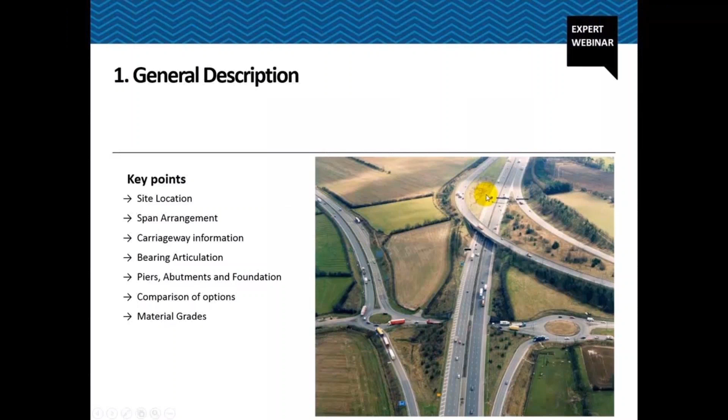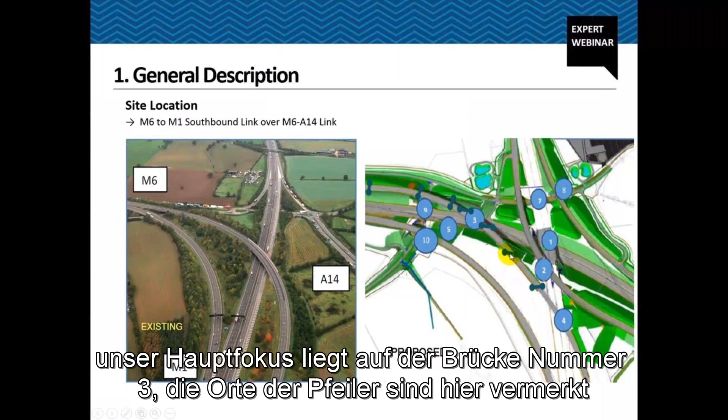So our main focus will be bridge number 3, which you can see here. The pier locations are marked. This is a 6-span bridge. You can see the skewed piers near where the 3 is written.

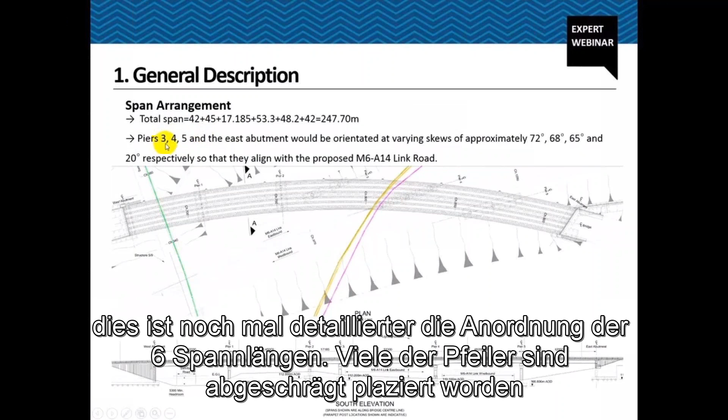So this is going to be the span arrangement in more detail. There are a total of 6 spans, and most of the piers are skewedly placed. You have piers 3, 4, 5 and the east abutment, which are having a very high skew in the range of 60 degrees, so that they can align with the proposed M6A14 link, which is going under the bridge.

And that's the elevation.

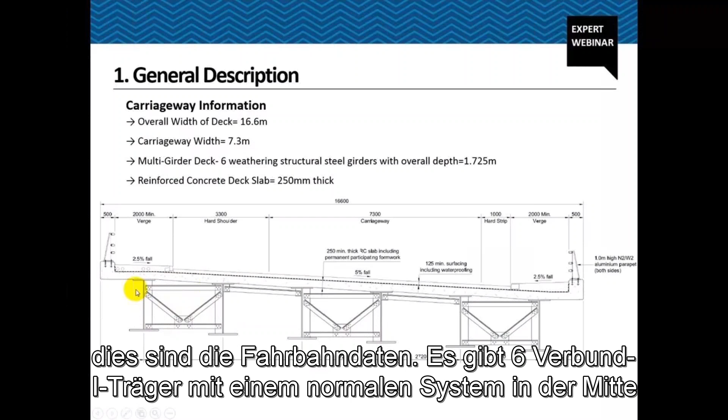This is the carriageway information. You have 6 composite steel I-girders with the bracing system in between. Overall width of the deck is 16.6 meters. The carriageway is 7.3 meters wide, which according to Eurocode will be designed with 2 notional lanes.

And then you have the reinforced concrete deck slab, which is 250 millimeters thick. The overall depth of the girders is 1.7 meters. And you have 2 verges on either side, 2 meters each.

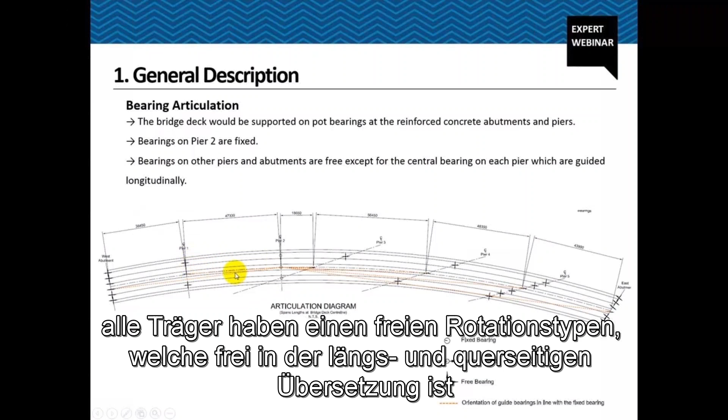The bearing articulation of the bridge is as shown here. Pot bearings have been used, and all the bearings are having a free type of rotation, which is free in translation in the lateral and the longitudinal direction, except for the central bearing for each pier.

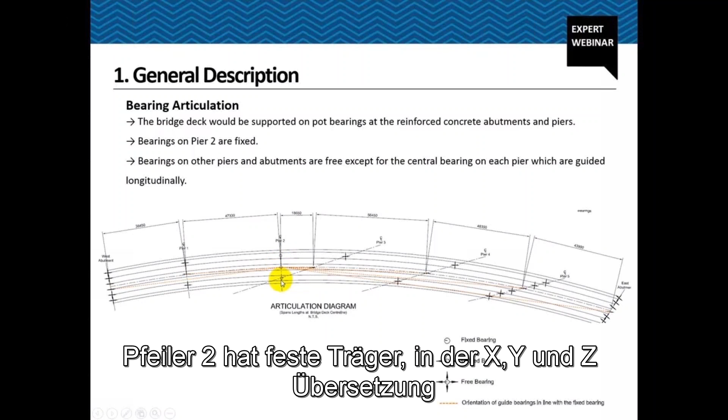As you can see here, the central bearing for each pier has been guided with respect to the central bearing on pier number 2. Pier number 2 has fixed bearings, fixed in X, Y, and Z translation. The columns are free to sway such that they can take the temperature movements.

Then the abutments and piers are reinforced concrete. Piers are basically circular in shape, with a torch shape, tapered - on the top they have a larger dimension and then tapered, finally having a dimension of 1.4 meter diameter.

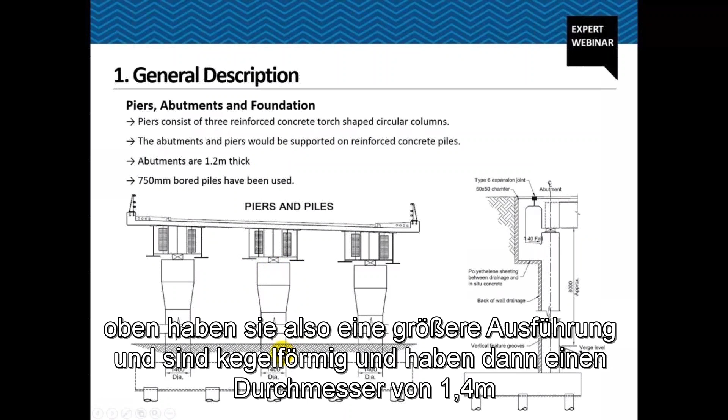It's supported on a pile cap with piles which are bored piles. The bored piles have been used here because of the depth, or because of the length - maximum length of the piles was going around 21 meters. And normally we would use CFA piles up to a depth of 12 meters because construction is very fast with CFA piles.

Typical diameter of the piles used is 750 millimeters. Abutments are 1.2 meters thick.

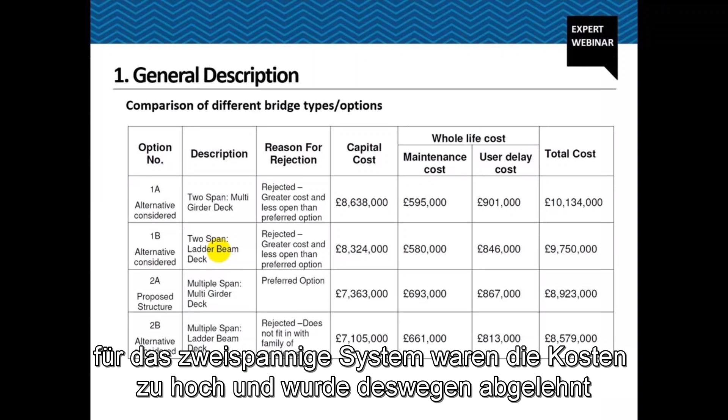Now there was some cost comparison done just to give an idea about what different bridge alternatives had been selected. Two bridge types were being looked upon. One is the ladder beam deck, which has two very deep main girders on the edges, and then in between they're supported by cross girders. So the cost for a two-span system for either ladder deck or multi-girder deck was too high, so it was rejected. The proposed structure consists of multi-girders, and this was seen to have a much more economical cost, and therefore this particular option was selected.

The ladder deck option was rejected also from the aesthetics point of view. It didn't match with the other set of structures that were coming up in that particular location.

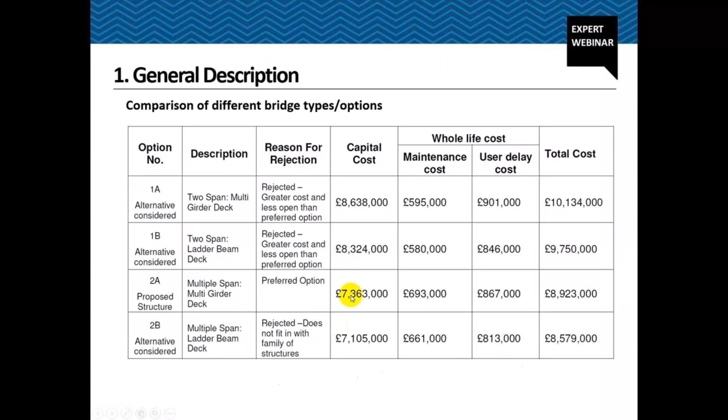This is information about the material grades used. C40 cylindrical strength for the deck and piers, and for the abutments and piles, 32 MPa strength of concrete was used.

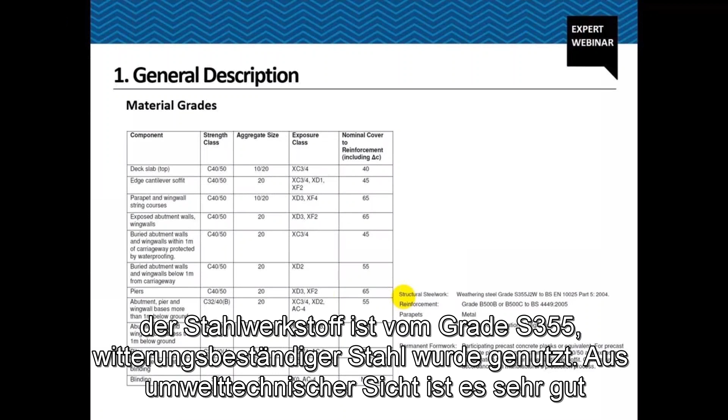Structural steel work is S355 grade steel. Weathering steel was used. The benefit of weathering steel from the environment point of view is very good because it doesn't require any artificial paints, which is good for sustainability and environment. Also, it can be recycled easily and reused.

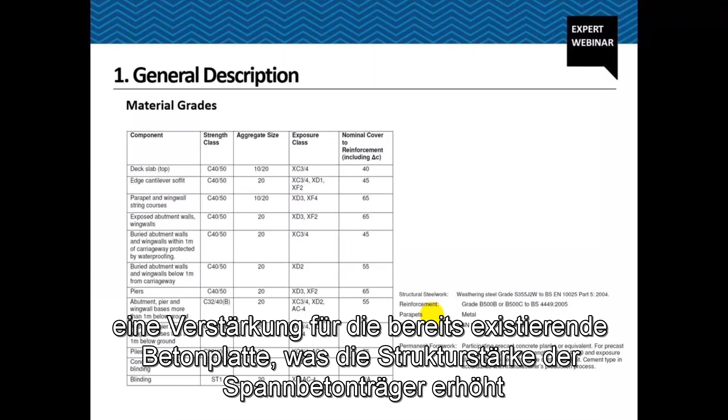A permanent formwork was used on the bridge, in the form of precast concrete planks. This serves in also providing some additional thickness to the existing reinforced concrete slab, thus increasing the structural strength of the composite steel girders.

Now I'll be talking about design actions that were considered in the checking of this bridge, or the design of this bridge.

Starting with the permanent actions, you have self-weight basically in the form of concrete and steel. Concrete and steel densities are shown here. Surfacing assumed was 120 millimeters, which you can say is the total wearing course.

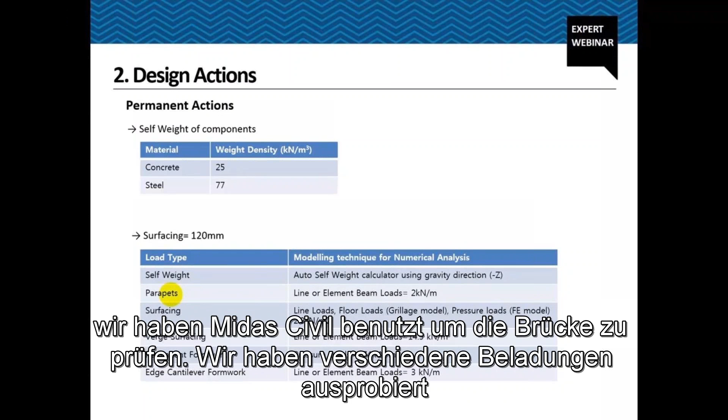There are a few pointers here about how the loads were applied in the numerical analysis software. We used Midas Civil for checking of this bridge, and we applied the different loads mostly in the form of line loads, as our model was a grillage model, and surfacing was applied as a load of 2.9 kilonewtons per meter square, distributed uniformly on the carriageway.

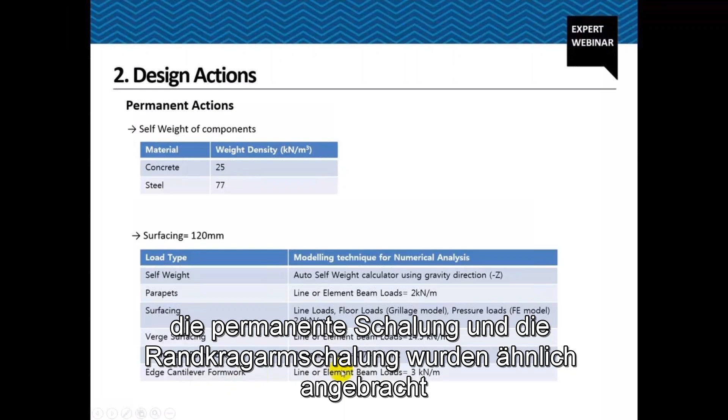Then permanent formwork and edge cantilever formwork were similarly applied. Just to give you an idea about how these loads were applied in the software, let me take you to the model itself.

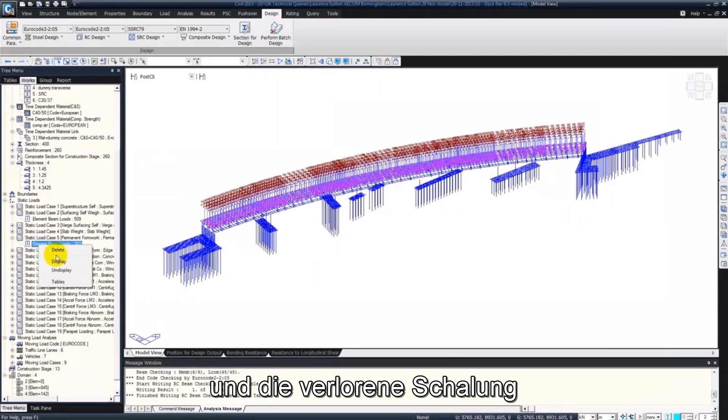So I have one of the models that we used in the analysis of this bridge. Basically, because of the user interface and the ease of application of loads, we could apply loads at different locations and different patches. As you can see here, we have the surfacing loads applied and permanent formwork distributed uniformly on different girders.

Then we move on to wind. As per Eurocode 1, basic wind velocities were taken. The calculation procedure is very similar to what we do in other codes - we have the wind pressure at a certain location multiplied with the coefficients.

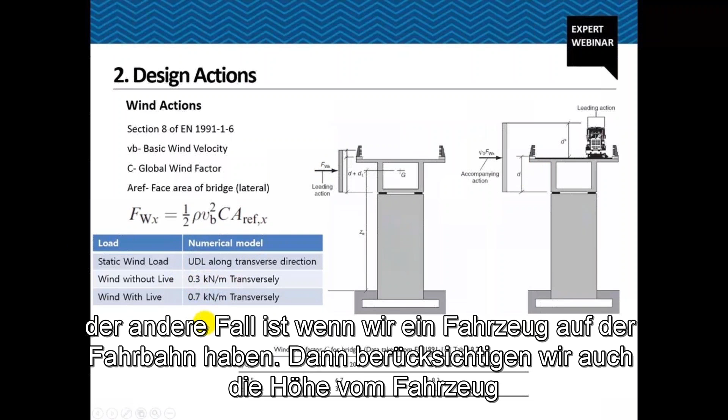We consider two cases: wind without live load, where the depth of the section is considered for wind calculation when there is no vehicle on it. The other case is with live load, where we also consider the height of the live load. These loads were applied in our model in the transverse direction throughout the length of the bridge.

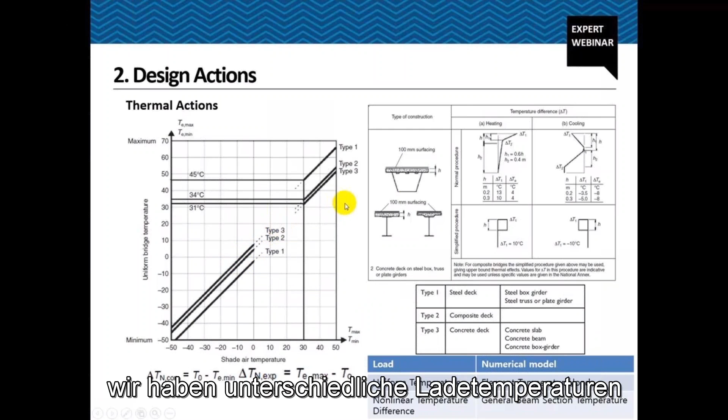Then we move on to thermal actions. As per Eurocode, we have two types of thermal actions defined on the structure: a uniform temperature action, which is maximum minimum temperature based on the shade air temperature, using a graph where the bridge type is a composite steel deck - type 3 or type 2. And we have temperature difference loading, based on the surfacing and reinforced concrete thickness, which can have a nonlinear difference in temperature on the top surface as we go along the height of the section. We applied these two types of loads in Midas Civil in our analysis.

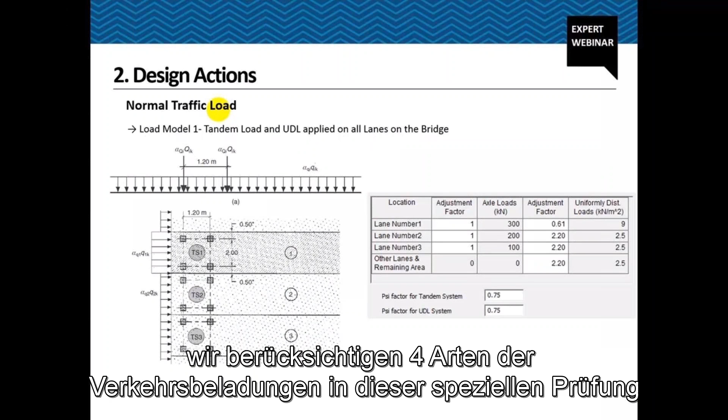Then we move on to traffic loads. Basically we consider four types of traffic loads in this checking. First is a normal traffic load, Load Model 1 as per Eurocode 1, which consists of a tandem load and a UDL, applied on all the lanes. The number of notional lanes is determined by the carriageway and also the shoulder.

So if I have a carriageway of 7.3 meters and 3 meters of shoulder, then we can have 3 notional lanes in that area, and the remaining part is defined as a remaining area. The table here shows what kind of loads are applied as per Eurocode, and adjustment factors, similar to lane factors used in other standards.

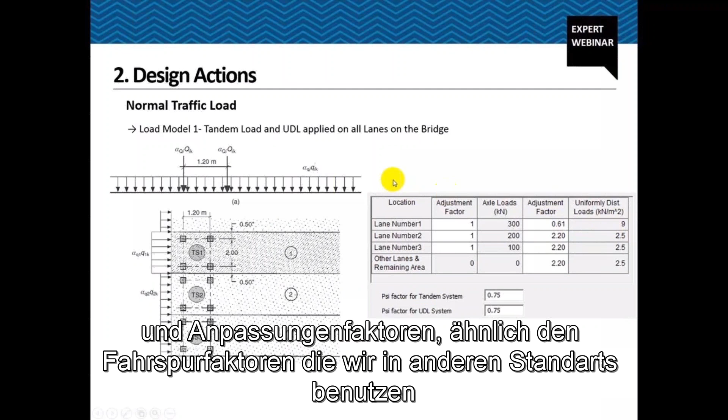Then there is a general order traffic load, which consists of multiple axles - a special vehicle, SV196. This is as per the UK National Annex of Eurocode, and has been considered in the checking of this bridge.

The characteristic of this vehicle is that it can straddle transversely, so it can occupy more than one lane at a time. This vehicle is also multiplied with a dynamic amplification factor, for vehicles at speeds greater than 70 kilometers per hour.

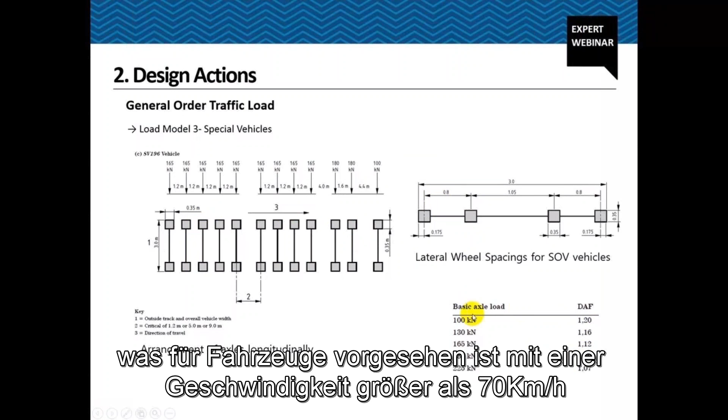In our live load analysis, we combine the live load effects of both Load Model 3 and Load Model 1. The way they are placed follows rules defined in the UK National Annex. As mentioned, this is a vehicle which can straddle 2 lanes, and there are specific rules for combination of Load Model 3 and Load Model 1.

Then footway actions. There are verges on either edge of the bridge, and we apply a footway loading of typically 5 kilonewton per meter square. This footway load is also applied in conjunction with load model 1, so when combined, we reduce the value to 60% of the footway loading combined with load model 1.

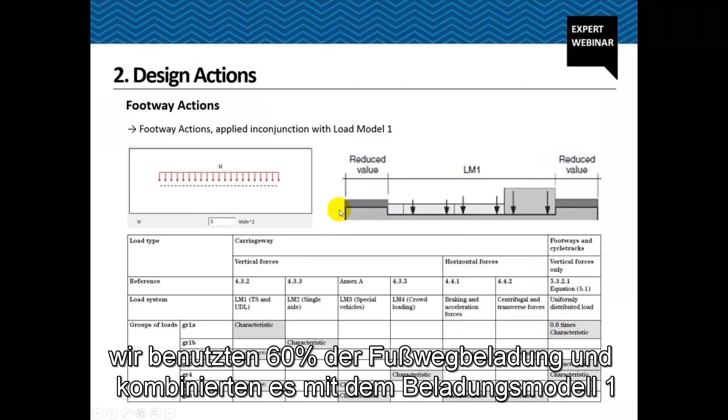Then there is a special clause required in the design basis report, which is the consideration of the abnormal vehicle, category C vehicle, as per the highway manual of the UK. This is the vehicle that was considered, similar to the special vehicle truck loading considered in the previous slide.

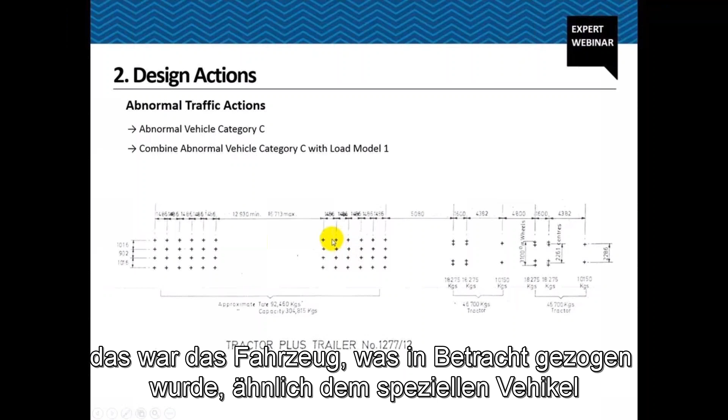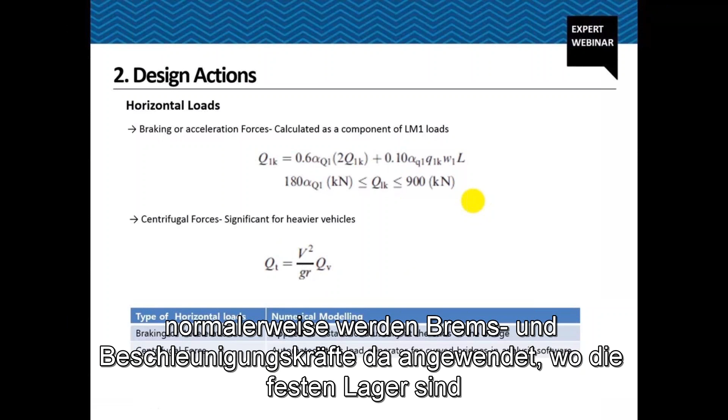Normally, braking and acceleration loads are applied wherever you have the fixed bearings, which can attract most of the horizontal forces.

Then, being a steel bridge, fatigue analysis needs to be done for such type of bridges. So fatigue load model, which is a special vehicle in the Eurocode, was considered - fatigue load model 3 - and this load is applied on only one lane on the bridge.

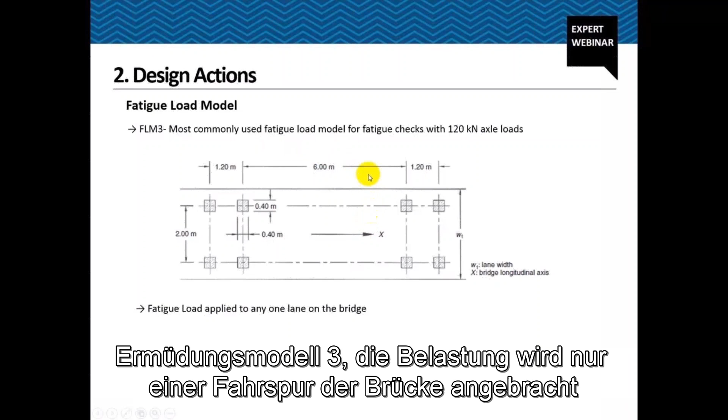Now we move on to how the structure was analyzed, how the forces were applied and analyzed. First let's look at the modeling part. The deck was modeled basically with a grillage of longitudinal and transverse elements.

Since the skew angle is greater than 20 degrees at the piers and also at the eastern abutment, an orthogonal type of grillage was used. You can see on the screen that the transverse elements are always perpendicular to the longitudinal elements at all locations.

The longitudinal elements mainly consist of the main girders, which have composite section properties, and then you have the transverse elements representing the transverse deck behavior. The properties used for the main girders include the effective slab from center to center distance of the main girders.

We also check the effective width of the section for stress analysis. There are different effective width formulations for different types of span, and that is used to reduce the width of the slab considered for stress calculation only.

For calculation of transverse deck properties, we reduce the torsional stiffness of the transverse deck so that we can attract more moments on the main girders. Similarly, we can reduce the torsional stiffness of main girders when designing the transverse elements, so that we can have a safer design for the transverse direction rebars.

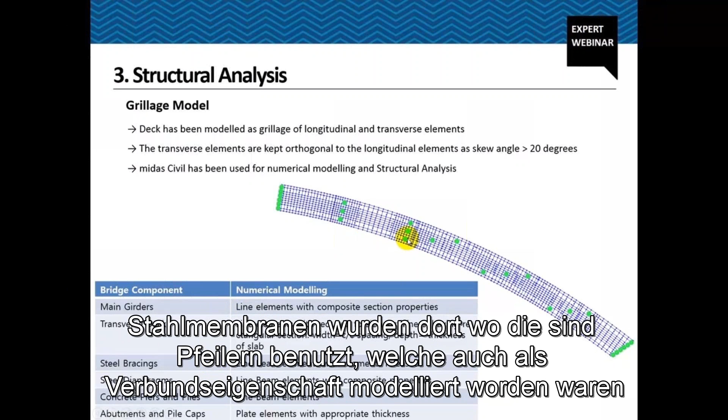Let's have a look at the model again. In Midas, because of a more CAD-based interface, we could model both the substructure and superstructure together.

The advantage of doing that is that we can include the same concurrent forces due to live loads and other variable loads coming on the superstructure concurrently on the foundation as well. This gives us a less conservative, or more accurate, analysis of the substructure, plus it reduces time in extraction of results because we have everything in the same model.

So you see here we have the grillage model with the bracings modeled as X type and K type bracings. This is just to show you how the bracings are connected to the grillage deck.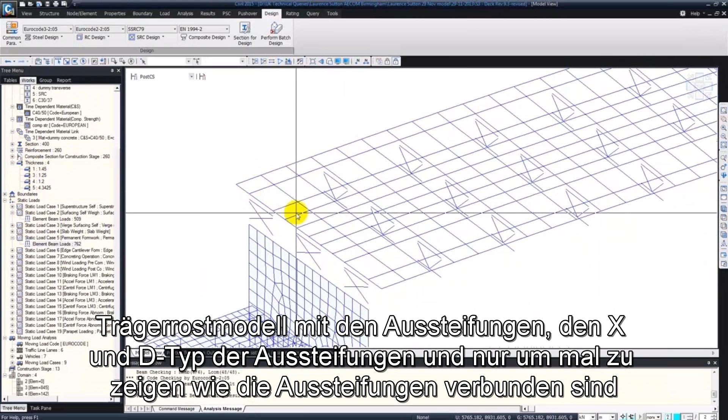We've used a rigid link with the master node as the deck node, which is connected rigidly to all the bracing elements.

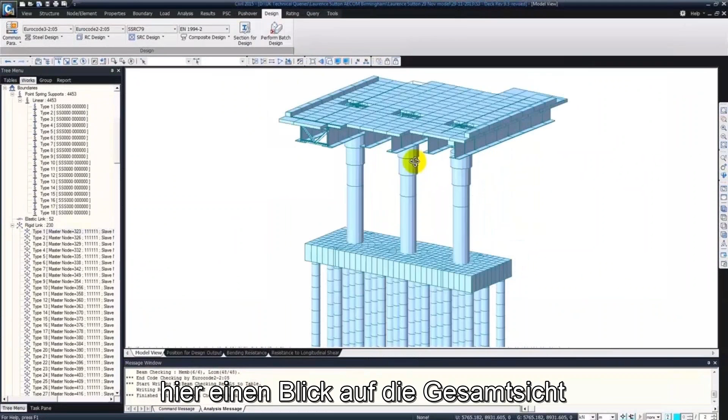And then the piles are also applied. The piles are also provided with soil springs, both in the horizontal and vertical directions.

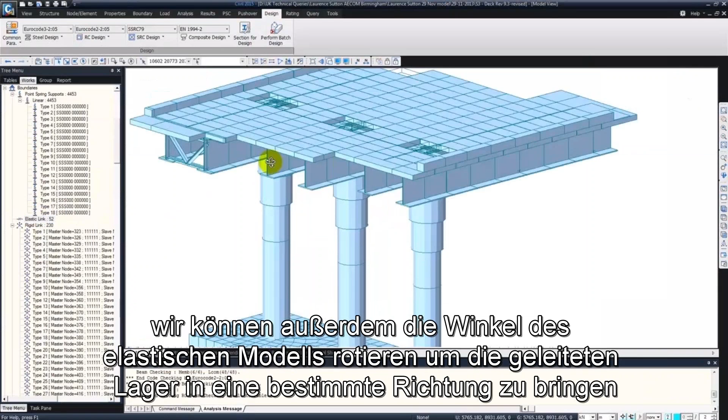And then we have the bearings modeled as elastic links in the software. Elastic link is a very good feature in Midas Civil that allows us to put in different stiffnesses of the bearing and also put in guided bearings or fixed bearings. And we could also rotate the angles of the elastic link so that we get guided bearings in a particular direction. So all those things were reflected in the analysis here.

These are some snapshots taken from the model.

For the analysis of concrete, because it's a composite bridge, the pouring of the concrete has been done at different time intervals. So the creep and shrinkage and compressive strength behavior of the concrete has also been defined in our analysis as per Eurocode 2 - basically the creep coefficient versus time, shrinkage strain versus time, and strength gain versus time.

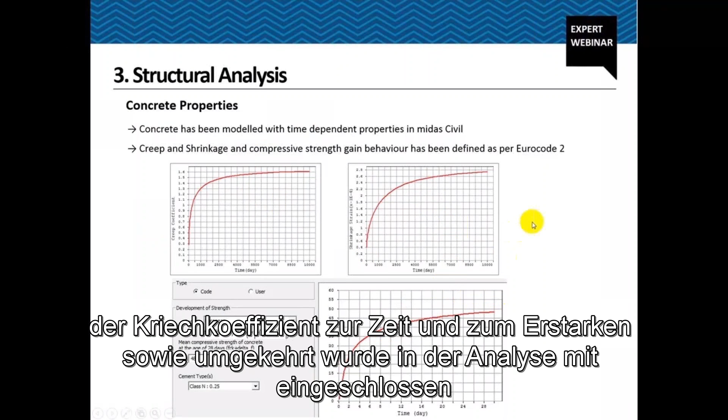Now how the composite properties were assigned: as per Eurocode we need to keep 15% of the span on either side of the intermediate supports cracked. So most of the main girders were assigned composite properties, except for the locations 15% of span on either side of intermediate supports, where the slab was not considered - only reinforcement and steel was considered.

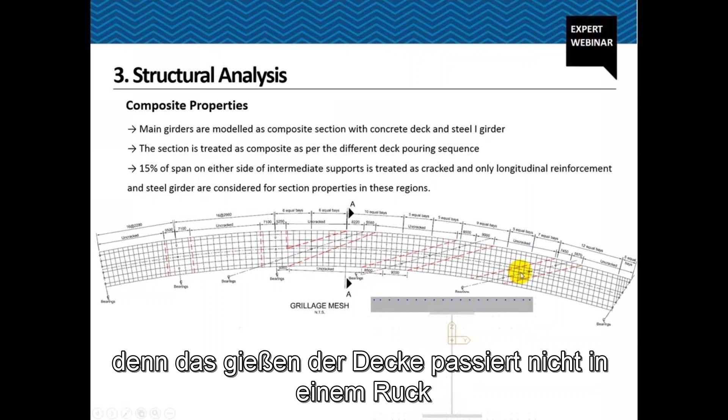And also the main girders are considered composite at different stages because the pouring of the deck does not happen in one go. We pour the deck in different stages, so based on the sequence of the pouring, the beams become composite one by one.

So these lines you see represent the locations where you have the uncracked and the cracked sections. Okay, so if I go back to the model, we have defined reinforcement to our composite steel section.

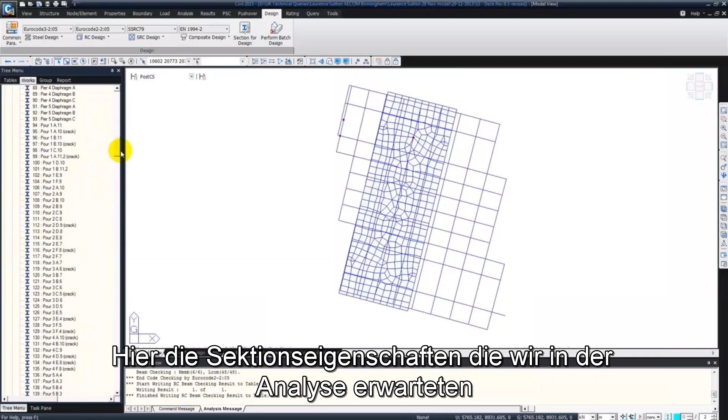Let me show you just the section properties that we assumed in the analysis. So this is how we defined our composite section. The slab width was 2.86 meters, and these are a few specifications of the girders.

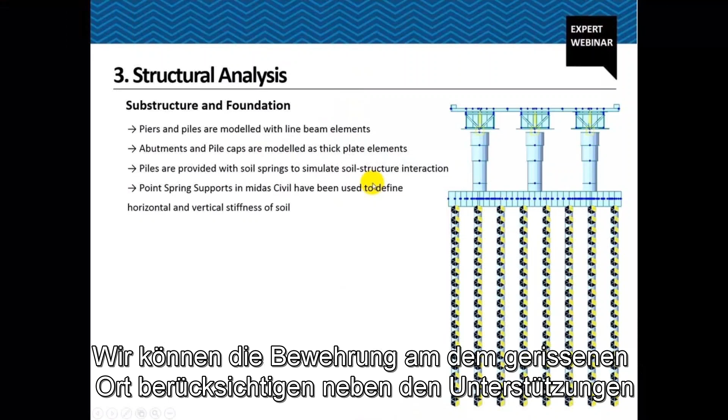Substructure and foundation modeled as line elements for piers and piles, and plate elements for the abutments and pile caps. Point spring supports in Midas Civil were used to define the vertical and horizontal stiffness of the soil to consider soil structure interaction.

Now we'll talk about the construction sequence of this bridge. The main part of the construction sequence was to decide the pouring sequence, how the deck was to be poured, because the bridge is so skewed, especially on the eastern side. It was critical to have a very good pouring sequence so that we don't have any uplift in any of the bearings, or excessive deformations in the steel girders.

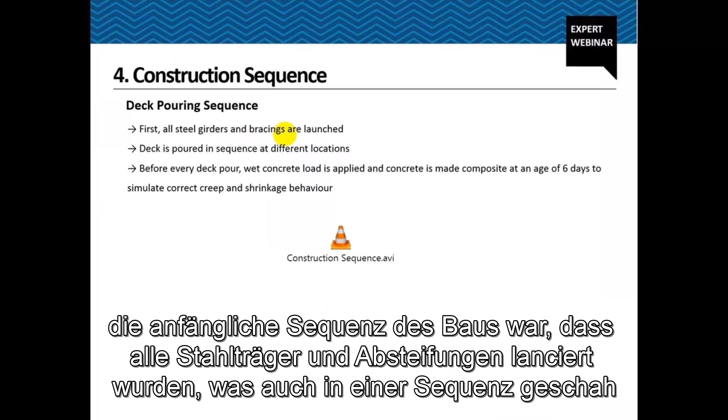So let us look at how the pouring was done in this particular bridge. The basic stage of construction was all steel girders were first launched, and the launching was done in a sequence from one end, from east to the west end. Permanent bracings were automatically launched as the steel girders were launched, and we had to use some temporary bracings to control the deformation.

Deck is also poured in sequence. Before every deck pour, the wet concrete load was applied in the analysis, and after 6 days the concrete was made composite. This was done to simulate the correct load-taking capability of the concrete and the correct age of concrete when it was able to take the loads, and creep and shrinkage behavior was considered as per that loading.

So here I have a short video just showing how the construction sequence was done. This video is going a little fast, so I'll pause it and show you - you have the steel girders first launched on one of the spans, and then it slowly goes on.

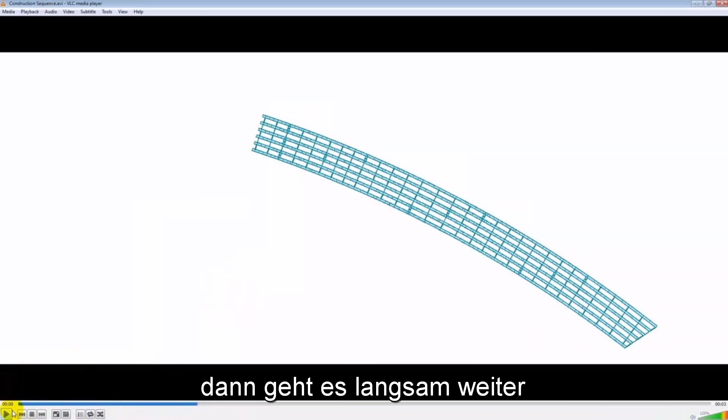Okay, and then you have the deck being poured in different stages. Starting from the east end, you have this kind of zigzag deck pouring sequence, so the support regions are left empty, and they are later filled. That's how the construction sequence goes.

To show you in the software, I have another model opened up here which just focuses on the construction of the bridge. So to give you an idea, the first stage is where you have the steel girders in, then you have some temporary bracings in place.

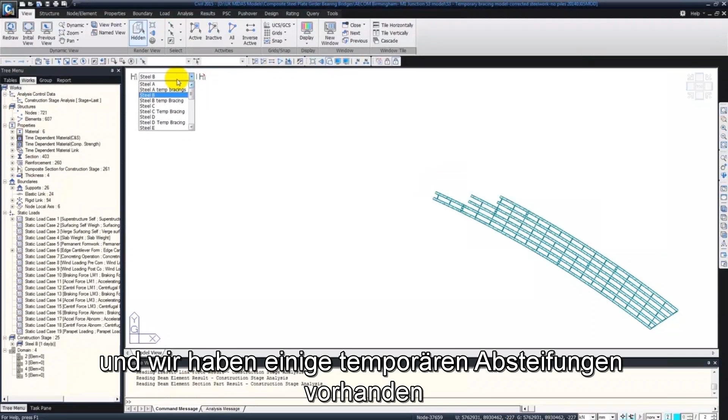And another span comes into picture, and then temporary bracings.

So it goes on. The way construction stages are defined in Midas helped us reduce a lot of time involved in the analysis, and we could edit the construction stages later on very easily, because we had to continuously change the construction sequence in order to come up with a more optimized way of pouring the deck.

So just to show you how we did it in the software, we have different construction stages we can model in a very simple fashion. We just define the elements or structural components we want to activate in a particular stage, or deactivate in a particular stage. Similarly for boundaries, any particular supports we want to include, we can include in the activated part, and the loads as well, like wet concrete loads and formwork loads. So all those can be considered very easily in the construction stages, and later on edited as well. So using this construction stage analysis wizard, we could model the steel work as well as the concrete.

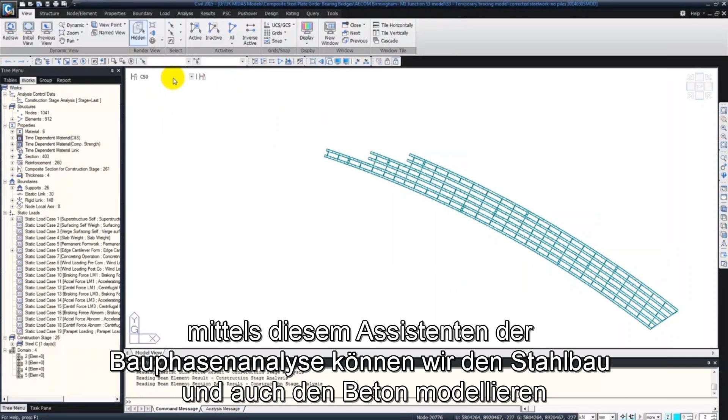Alright, so I'll just remove the meshed view to make it run a little bit faster.

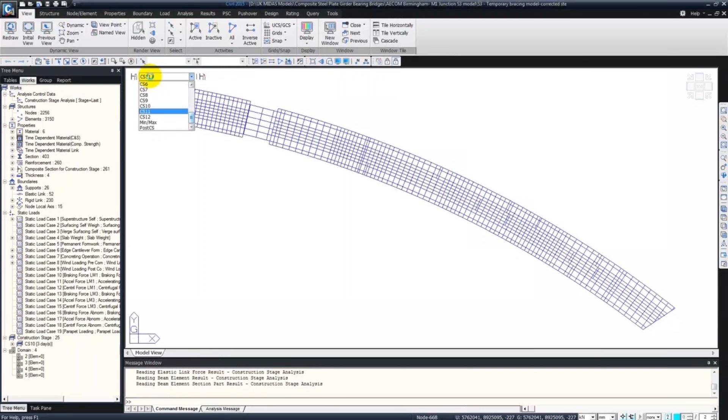So in CS1 we had the deck wet concrete poured. And in CS3 the deck becomes composite. So when it becomes composite, we activate the grillage elements as well, so transversely the deck starts participating, and so on. We have further deck coming up. And then in the last stage we have the SIDL applied in the form of surfacing.

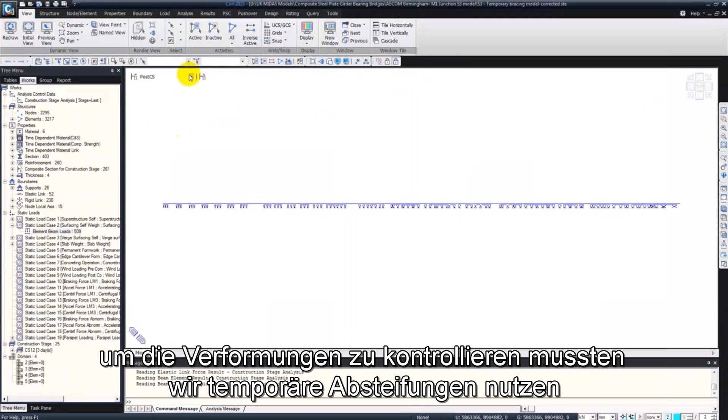Let's have a look at the deformation as well, because one of the challenges in this bridge was the excessive deformation in the steel work when the steel was being launched. So we had to provide temporary bracings accordingly to control the deformation.

So the construction stage model helps us to also obtain the pre-camber of the bridge, and that needs to be provided in the drawings for different load cases like self-weight, superimposed dead load, and creep and shrinkage. In different stages we were able to find out what the deformations were and where the temporary bracings needed to be placed. For example, especially in this skewed region, we have very high deformation in the edge girders, for which we needed to provide the bracings.

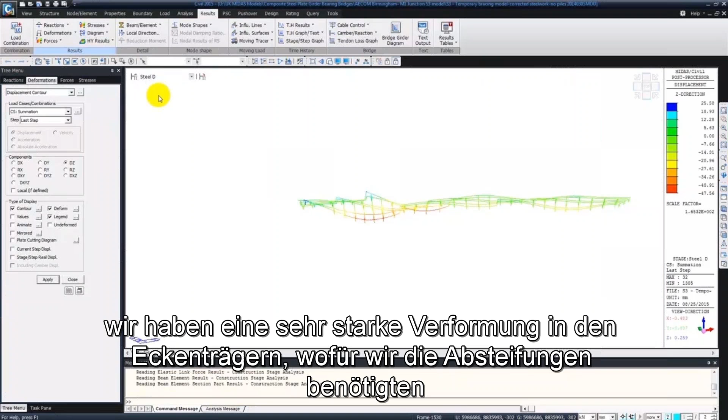So gradually we can see the deformations in the bridge, and similarly, when doing the design of the composite section, we can also incorporate the stresses, the locked-in stresses from the steel-only stage, and then combine it with the stage when we have the concrete in place, that is composite action. So we can look at beam diagrams also. This is the moment distribution.

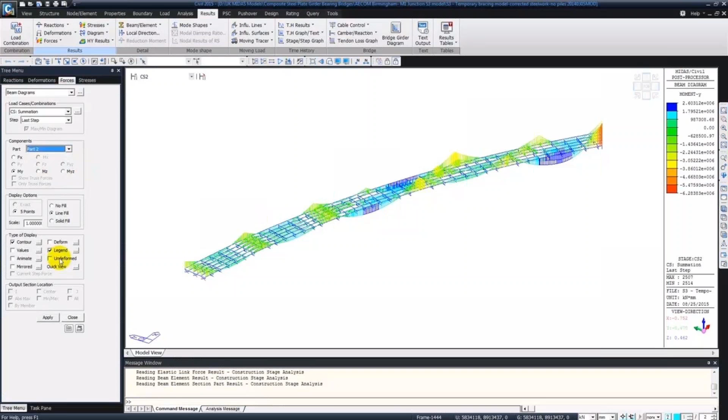So let's move on to the next aspect, where we will be talking about the design aspect of the bridge, how the bridge was designed and checked.

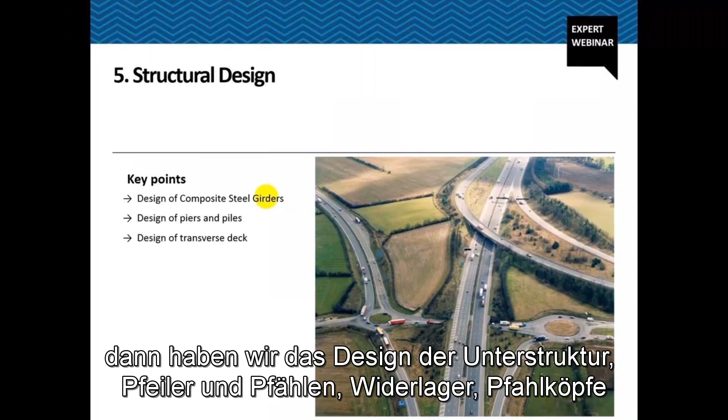I'll be talking about three major parts of the design. First is the design of the main girders, composite steel girders, then the design of the substructure, piers and piles, abutments, pile caps, and then the design of transverse reinforcement in the deck, transverse design of the deck.

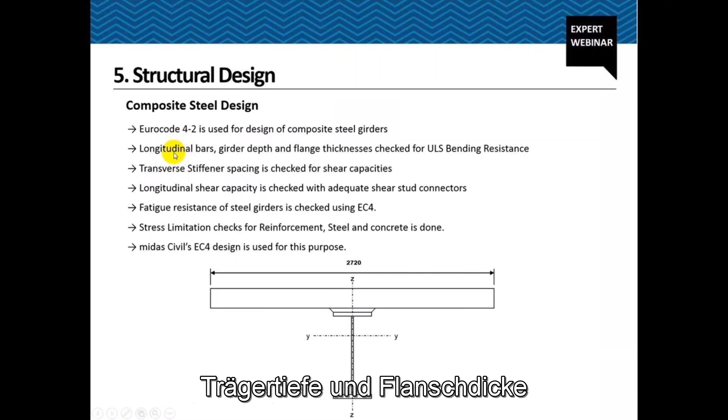First, the composite steel design: Eurocode 4 was followed for the design of composite steel girders. Major aspects of the design include the amount of longitudinal bars to be used, depth of the girder, flange thickness, web thickness, and also shear connectors for the longitudinal shear checks, and transverse stiffeners to be used on the web to resist vertical shear buckling due to the vertical shear.

And then SLS checks include stress limitation for reinforcement, steel and concrete. So let us go back to the analysis model, where I'll show you how all these aspects were covered in the design.

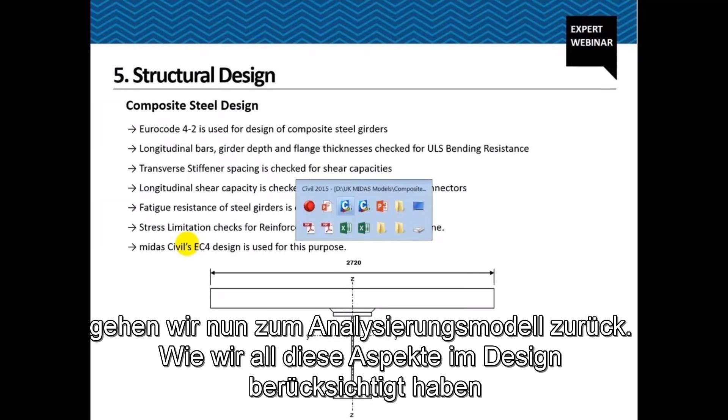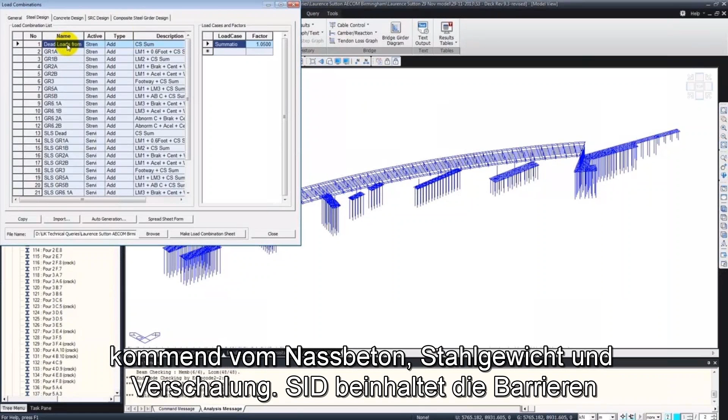So this is the full model. First of all, we generated some load combinations based on Eurocode as per UK Annex. So we had different combinations, just to go through them quickly. We have dead loads coming out from the construction stages, all the dead load locked-in forces and stresses coming from the construction stages, which includes wet concrete, steel weight, permanent formwork, and SIDL, which includes the barriers and surfacing, and then it will be combined with live loads, different live load combinations.

You can see here, I'll open up the description: abnormal live load loading plus dead loads. Then they were combined with other variable actions like wind. Then SLS combinations.

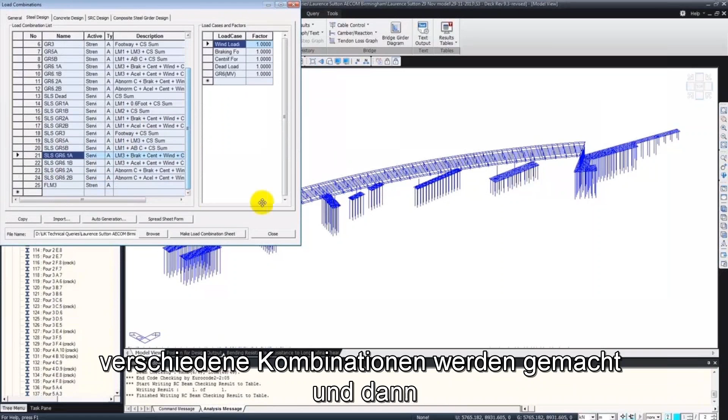Okay, so different combinations were done, and then after that we looked at the forces as well, just to check whether everything is according to the initial calculations that we had done by hand. So in the beam diagrams, you can look at both the forces in the steel work only section, and also in the section when the steel and concrete become composite.

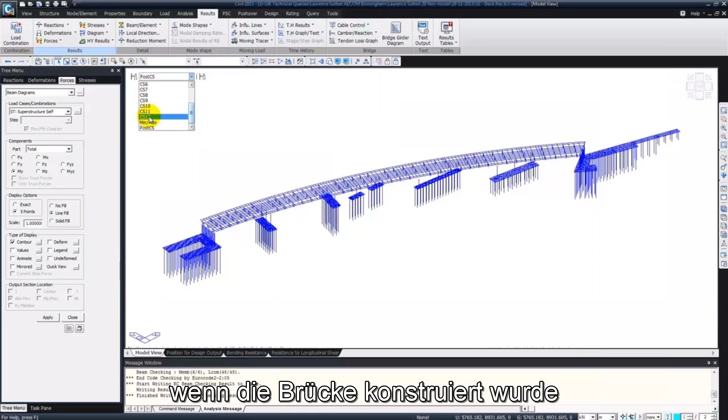So mainly we are interested in the dead loads. We have the locked in forces from the construction stages, so we can look at those as we just saw in the previous slide. We can extract forces and stresses from when the bridge was being constructed, and when the live load runs, we can look at the worst case live load positions and extract the envelope out. There's a very good facility in the software for doing that, which we used here. We were able to extract the position of the worst case live load.

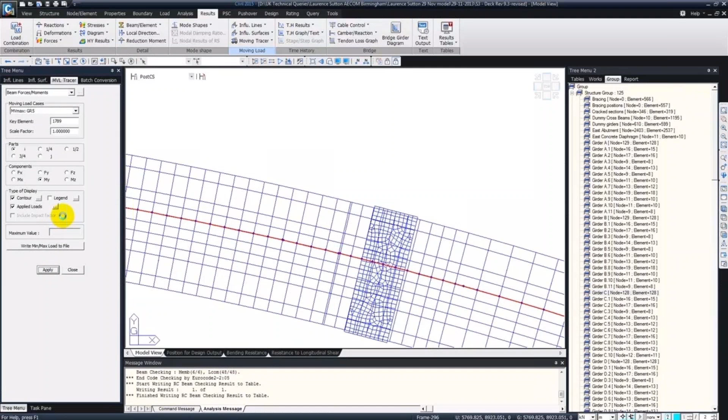Okay, so this is the worst case combination for a particular position here, somewhere in the mid span of span 1. This is for the load case where you have both load model 3 and load model 1.

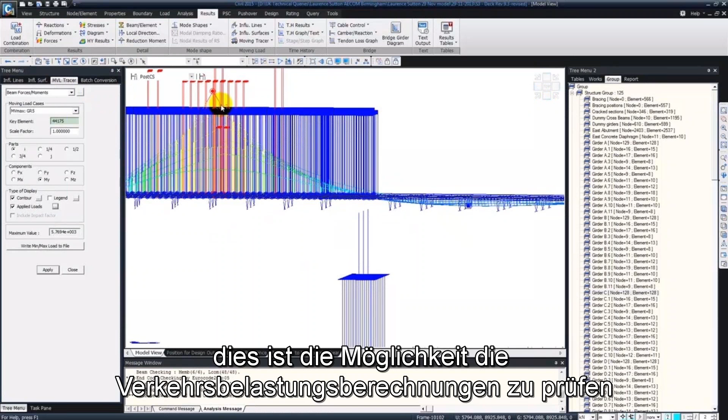Okay, so you can see how the vehicle has been positioned in alternate spans to obtain maximum sagging moment. And the influence line can also be seen in the background. So that's how we could check the live load calculations with our own in-house calculations, and also extract the maximum envelope of these for the live load for particular girders.

For example, if I activate one of the girders here, this is how we could extract envelopes and then quickly transfer it to Excel sheets where we could apply some more calculations on it. So everything was available in the table format.

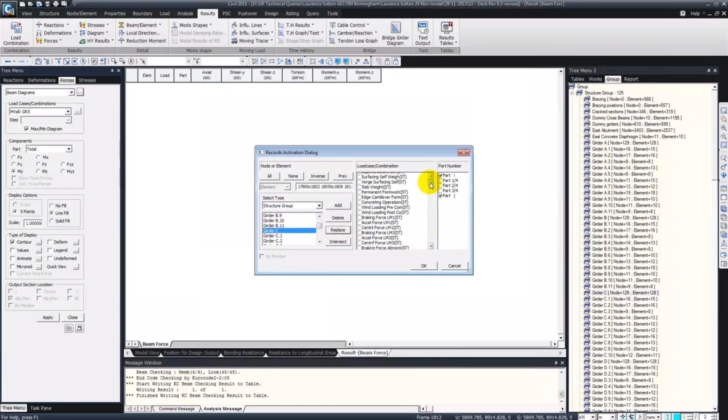Okay, so like this, and this also helped us to get the coexisting forces too. So not only the maximum or minimum forces, but also coexisting moments with maximum axial force, for instance.

So that's the force part of it, and then for the design part, we used the inbuilt design wizard, and this really helped us to quicken the process of the design, because we could just use the parameters here, and they were similar to what parameters we were checking for. So we had ULS checks for bending resistance, vertical shear, stress limitation check for SLS, longitudinal shear checks.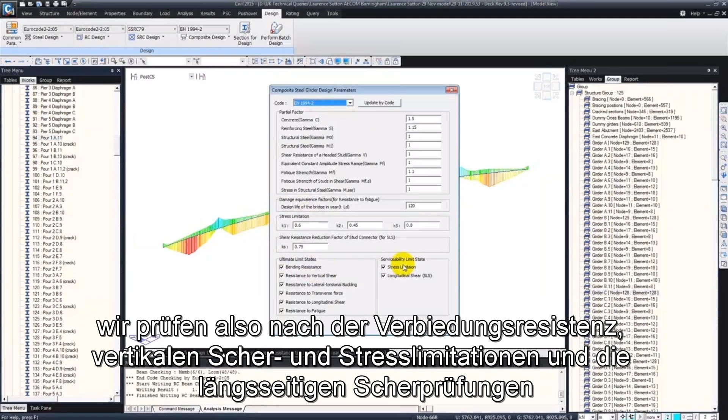Okay. Then design material, then shear connectors. So typically we had two numbers of shear connectors applied on all the girders, except for places of high shear where, like the pier diaphragms, we went for 3 number of shear connectors. Tensile strength was as per the shear stud specifications, and again height and center to center distance of the shear connectors could be entered. So everything was entered in a table format and also directly applied to the model.

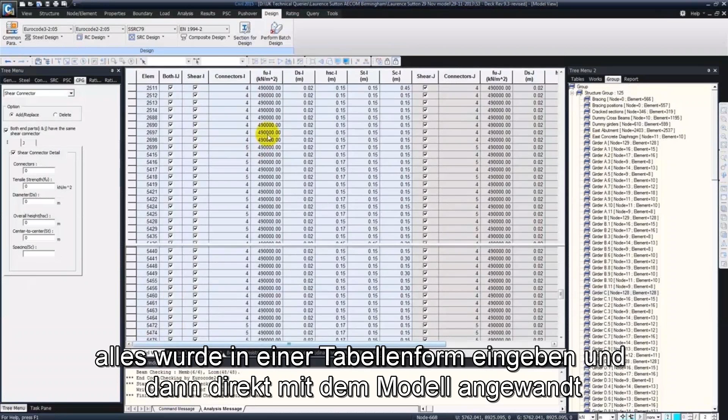Okay, and then we had transverse stiffener. So spacing of the transverse stiffener was also different in different parts of the section, and that was checked and modified in some cases based on the vertical shear checks that we obtained. So for vertical shear web buckling, transverse stiffeners are provided to resist that buckling. We have transverse stiffeners, typically 250 millimeter by 25 millimeter thick, provided at different intervals, spacings.

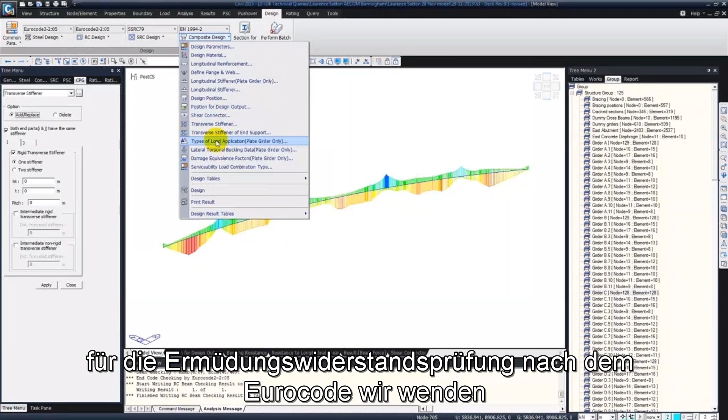And then we have fatigue checks. So for fatigue analysis, typically for fatigue check, only one load case, that is the fatigue load model, is considered in the combination. And for the fatigue resistance check, as per Eurocode 4, we apply damage equivalence factors, which stand for the number of cycles of damage for the traffic loads applied on the bridge.

And with all these parameters, Midas Civil came up with very nice tabulated tables, like bending resistance tables, which informed us about the classification of the section, the steel sections, top flange, bottom flange classification, as in the compact, non-compact, semi-compact, or class 1, 2, 3, 4.

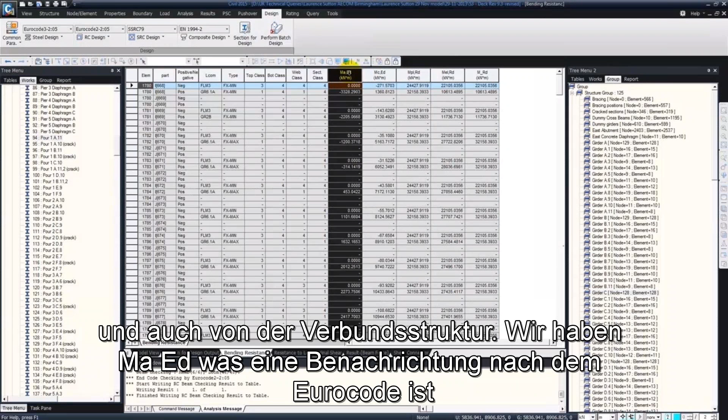And then the moments that are being applied, because it's an unpropped construction, we have moments applied and to be considered in the design from both the steel structure as well as the composite structure. So we have Ma,Ed, which is the same notation used in Eurocode for the forces or moments in steel only, and Mc,Ed, which is moments in concrete only, meaning after becoming composite, what is the additional moment that is coming into picture.

And then based on the compact or non-compact section, we calculate plastic moment resistance and elastic moment resistance. And finally, based on the compact section, we find out what is the actual moment of resistance. So it did all those calculations, which made it easier to extract the results and check quickly which part of the section was failing, and then modify or comment on those particular parts.

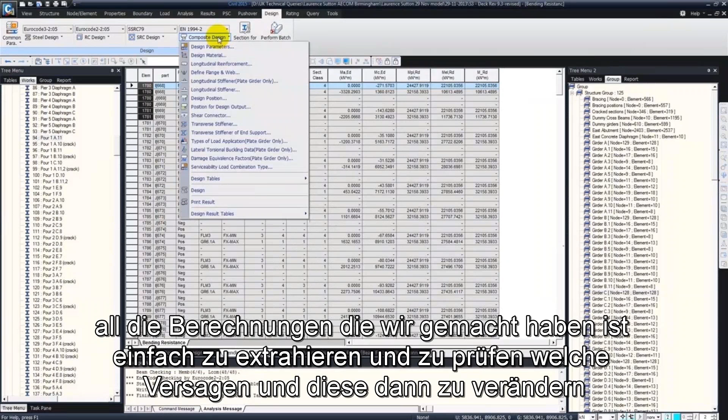Similarly, vertical shear resistance checks were performed, which take into consideration the combined axial moment and shear check. With all these sheets, we could also extract a detailed calculation sheet to check the steps of calculation and include it in reports.

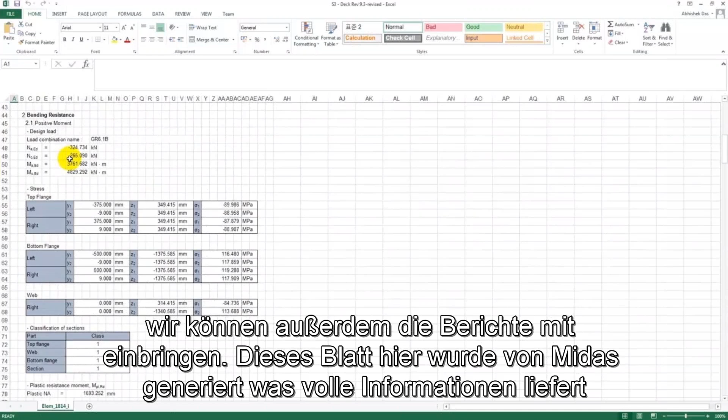This type of sheet was generated by Midas, which provided full information on the bending resistance and shear capacities of the section, so we could easily correlate with what clause of the Eurocode was being followed in the software, and whatever remained we could do simple hand calculations to prove.

For the longitudinal rebars, we do the design and check the moment capacities, but we also check whether the longitudinal and transverse reinforcement are sufficient to carry the shear that occurs at the interface of steel and concrete near the shear studs. That's another check we can do, plus special checks at splice zones, bearing locations, and for bracings, all done using Excel sheets.

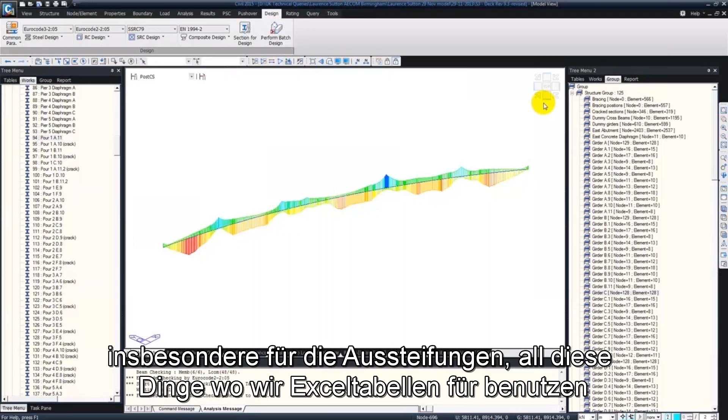A very good guidance for steel bridges that we can follow is the Steel Construction Institute manual, and also the Eurocode 4 design guide by Thomas Telford.

After the composite steel design, we could come up with a drawing table like this, consisting of information about the plates used in the girders, stiffener spacing, shear connectors used, and top and bottom flange welds. The pre-camber information was calculated from the construction stage analysis. This table with different plus and minus numbers shows the pre-camber information for steel self-weight, self-weight of concrete, SIDL, etc.

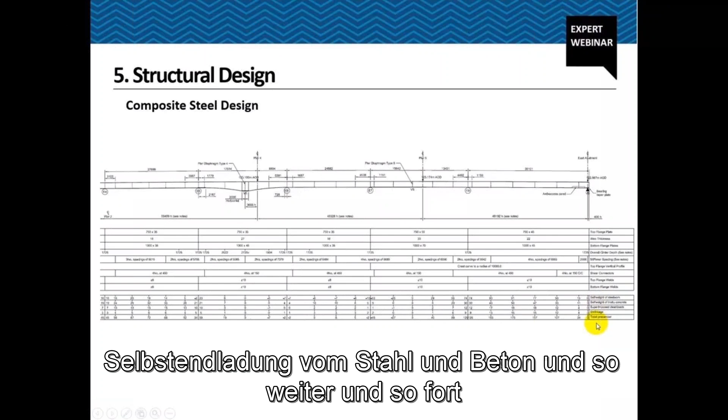For pier and pile design, because we had everything in the same model, we could extract the same combination for both superstructure and substructure design. Let me give an example of how we did it in the software.

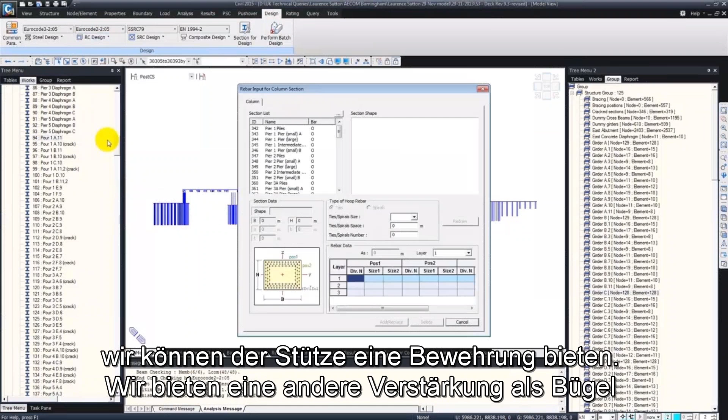Again, for Eurocode 2, we use the inbuilt feature for column checking. We could extract the MN interaction curves and do a combined axial bending capacity check for columns. I'll select a few columns here and look at the checks. We could provide column reinforcement for checking, with different reinforcement and stirrups provided.

And we obtained some information. This is one of the preliminary models. You can see the axial resistance check, which shows some red zones, meaning some reinforcement needs to be increased in the concrete column.

It does the full checking, stress check, and also ULS check for the columns. Again, just like with Eurocode 4, we were able to cross-verify by extracting a detailed calculation report, which we can correlate with the code to see if everything is going fine within the calculations.

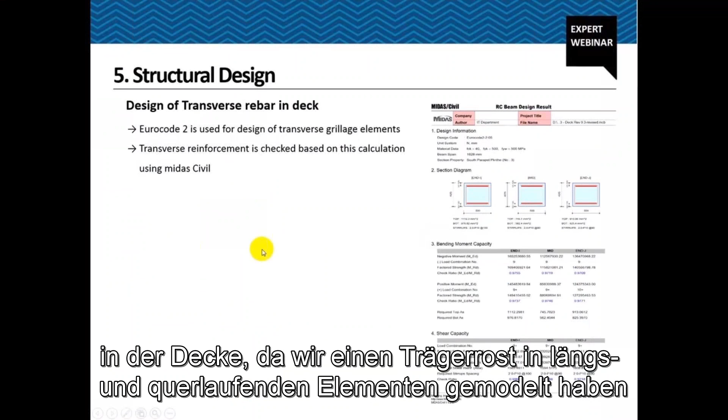Then, similarly, the next stage was designing the transverse reinforcement in the deck. Since we had modeled it as a grillage of transverse and longitudinal elements, we could directly design the transverse beam to calculate how much reinforcement was needed in the transverse direction for the deck. Of course, we also checked it using plate analysis later to be sure the stresses are in control and whatever we assumed in the grillage model is correct. Normally the grillage model gives a more conservative design.

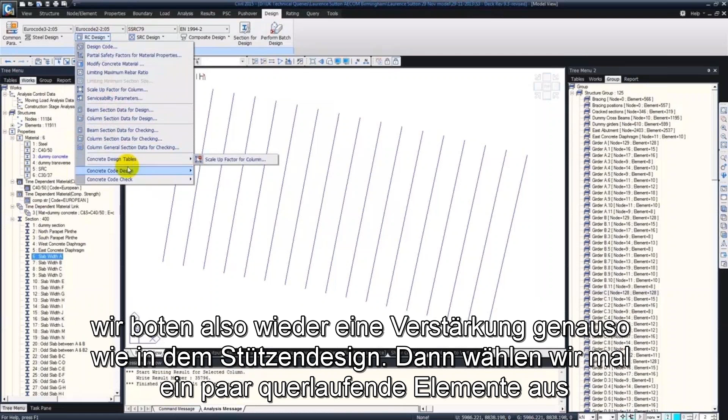Coming back to the grillage model, if I take one of the transverse elements, that's a starting span only. Again we provided some reinforcement just like the column design, then selected a few transverse elements and checked them.

Those are the different sections cut out on the transverse members, and we've got the beam moment capacity and shear capacity. Similarly, we can also obtain the serviceability information, crack control, deflection control, and stress control checks.

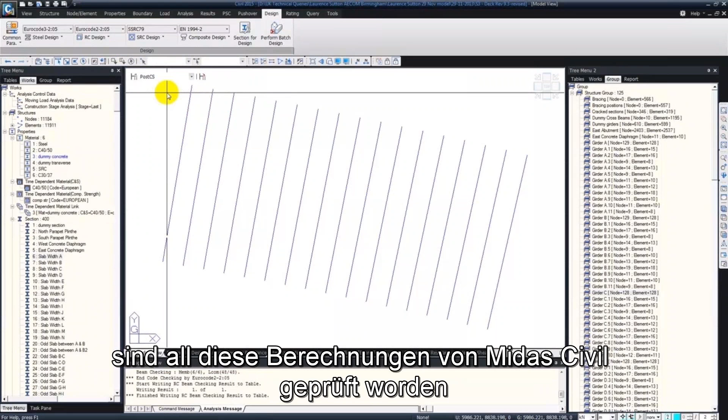We could summarize all these reports in a table format from Midas and include it in our report, and of course we checked all these calculations through the detailed report of Midas through different clauses of Eurocode to cross-verify. These are different aspects that were used in the design.

So with this I come to the end of the session. I hope I was able to cover most of the important aspects of the design and analysis of the composite steel bridge that we did. There were also a lot of other aspects, but time permitting, I was only able to include the major ones.